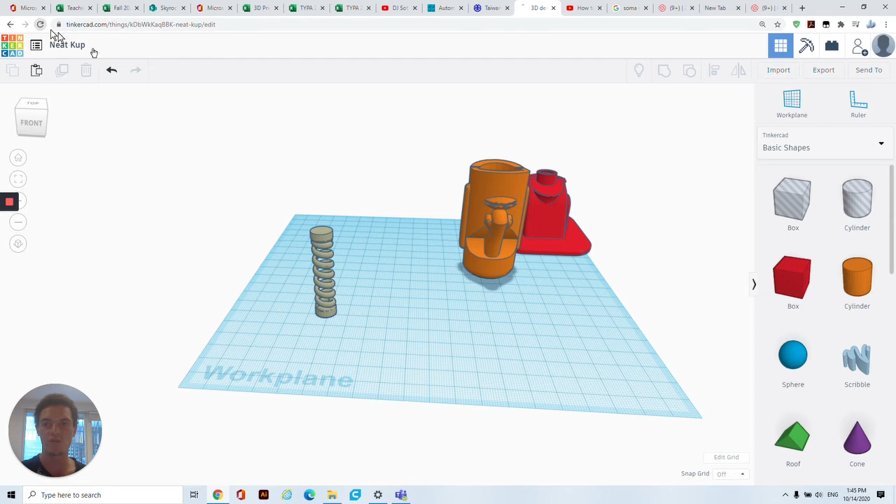I did mention in the last one that you can use store-bought springs. If you decide to use those, feel free to skip this part, but it's important that you follow the same instructions we used in the last tutorial, just using the measurements of the actual physical spring on hand. This will make things easier, and you can skip this part, but I'm going to show you how to do this quickly.

I'm going to show you what our end goal is, and then show you how to get there. So I'm going to import one I've already done.

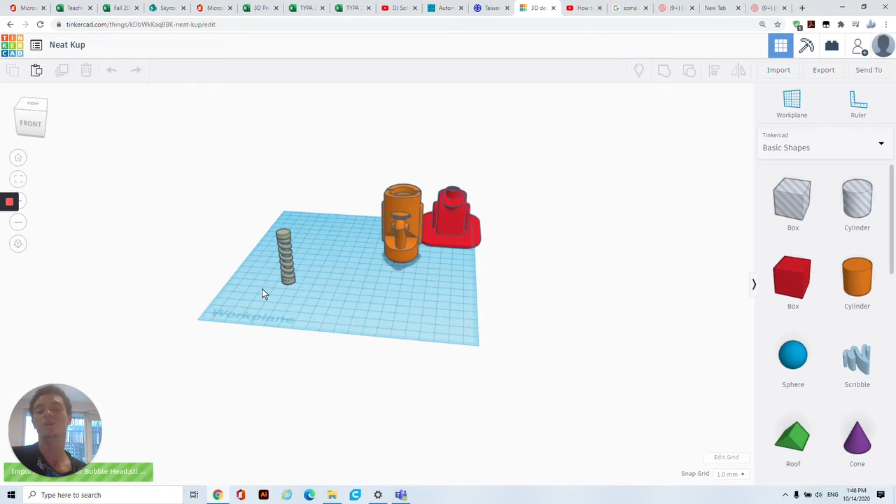So this is a spring with supports. The reason we need supports, or the reason we're going to be making them in this video, is because of the shape of the spring.

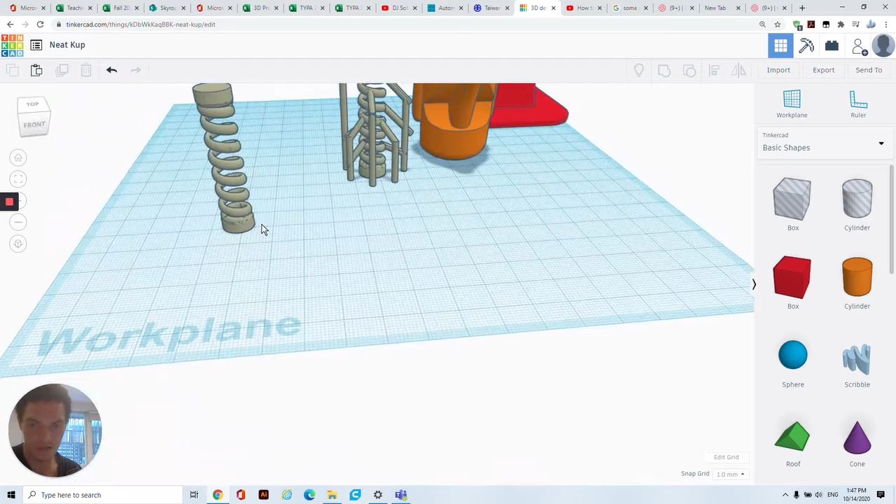A 3D printer prints from the bottom upwards, and notice there are gaps in these springs. As it comes around, it prints the base, which should be fine, it's all solid. As it comes around here, you are left with an overhang with no support. The problem is we cannot simply generate supports because we will need to cut them out.

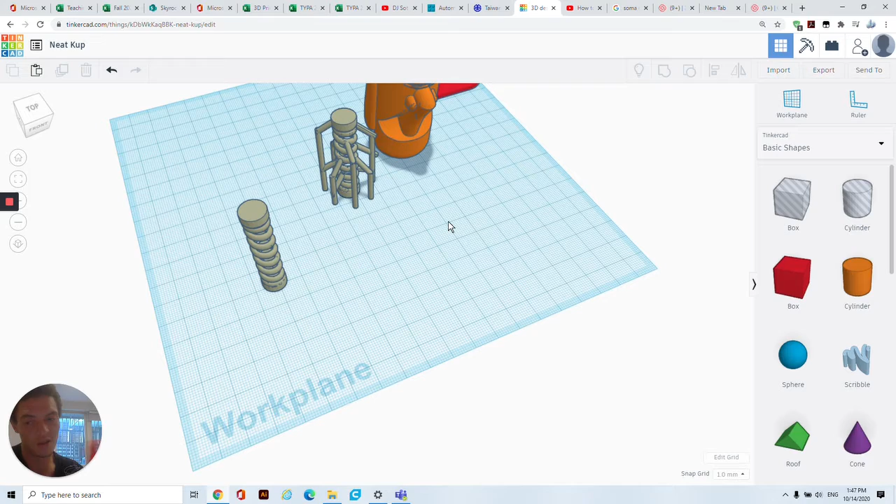The spring needs to be pretty thin so that it achieves the moving effect, so in order to get a successful print, we will need to build supports like this. You can see this one I built earlier. Not the most beautiful looking support system, but definitely an effective one, as you can see.

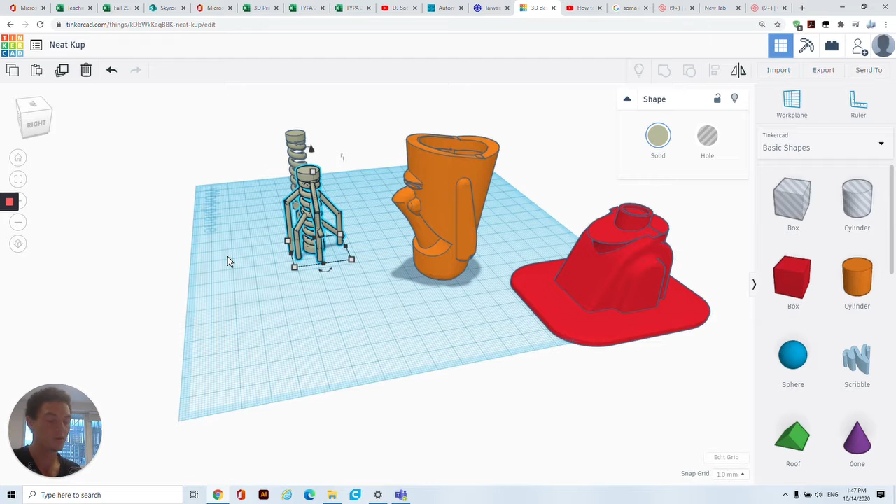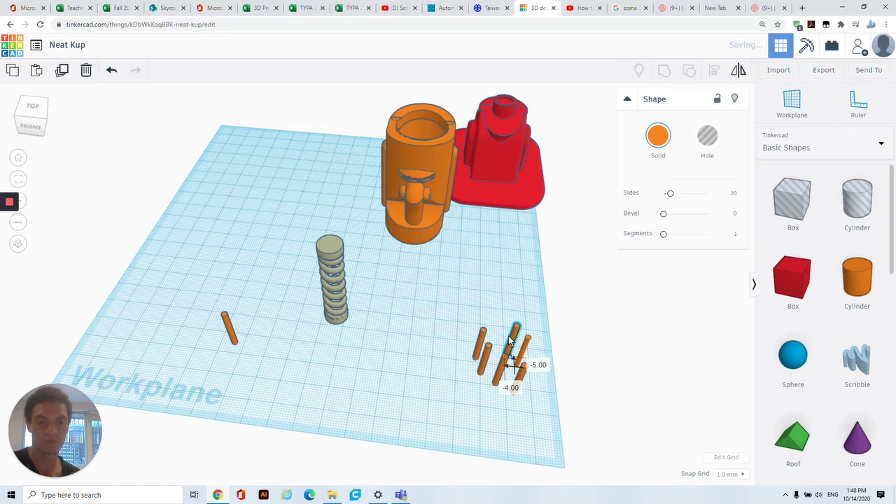So what we're going to do is take this away and start from scratch. First, I want to drag out a cylinder and change my width to 2 millimeters by 2 millimeters. I'm going to make a few copies because I'll keep coming back and using them, just holding down the Alt key and dragging out new copies. I think that should be enough.

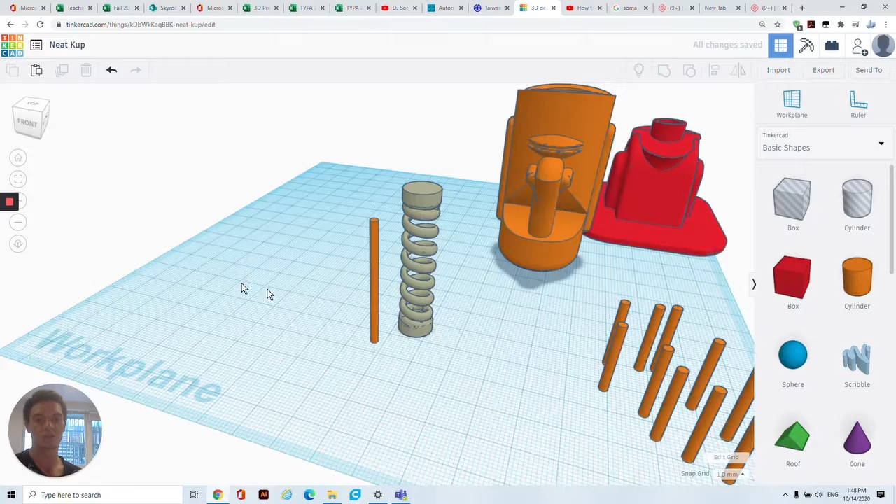So we're going to start over here. You can really start anywhere, because it's a circle, there's no end or beginning. Let's start from the top. I'll adjust the height and take another one, and twist it.

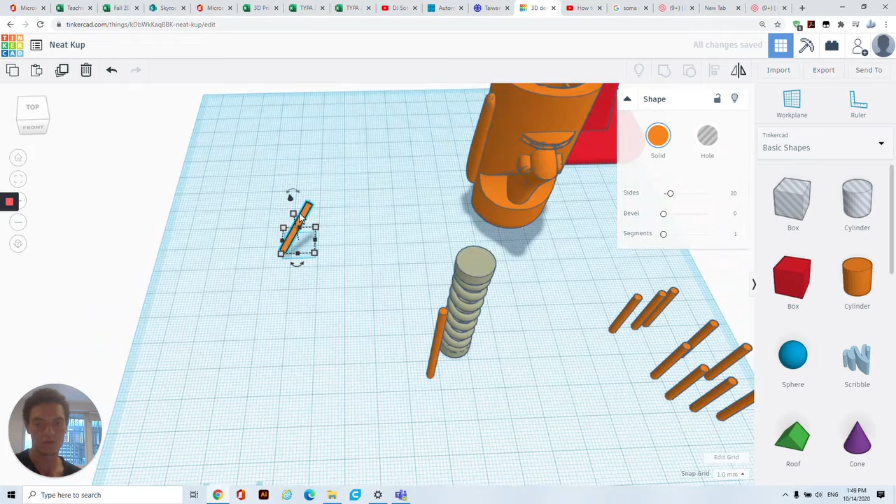Make sure you have the right angle, because what we want to do is put this at an angle so that we may connect it to our spring. So effectively we are designing our own support system. Let's drop that down a little bit so it touches the top there. That works for me, you can change the length a little bit.

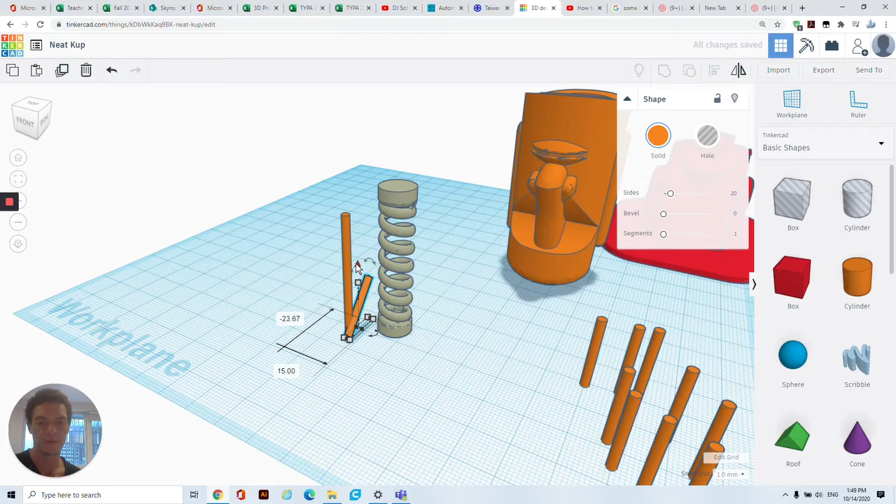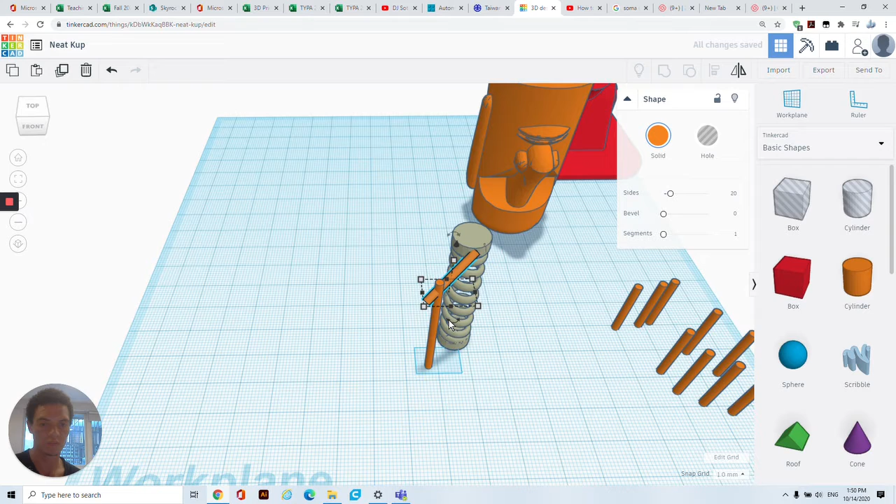Here's the other problem: we need to make sure our length is the right length before we start, because it's very difficult to adjust length while we're busy with our project. This does take a little bit of trial and error. It's important that you remain patient throughout.

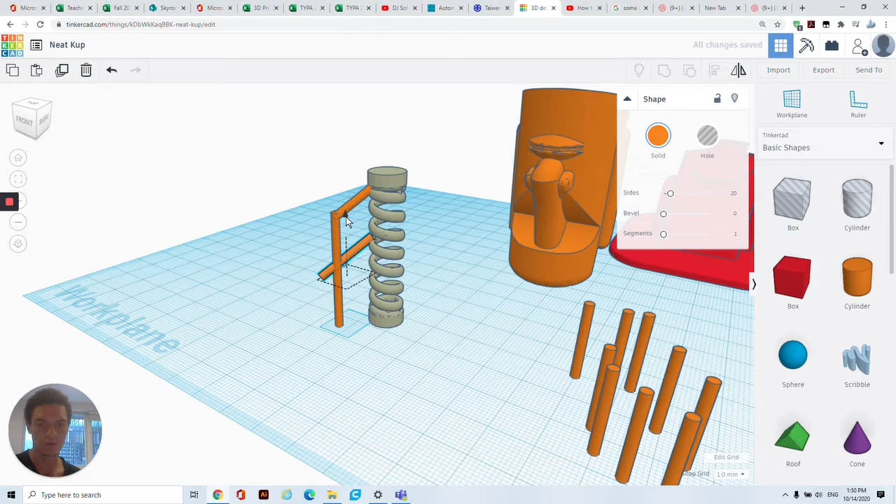That works for me, and I'm going to adjust the height over here. Now that I have that one, I can click on it and duplicate it the same way as the previous one, just Alt and Shift it down. If there's an overlap, let's move it out. I'd rather have the overlap come on this side than the other side of the spring. We want to maintain the integrity of the spring.

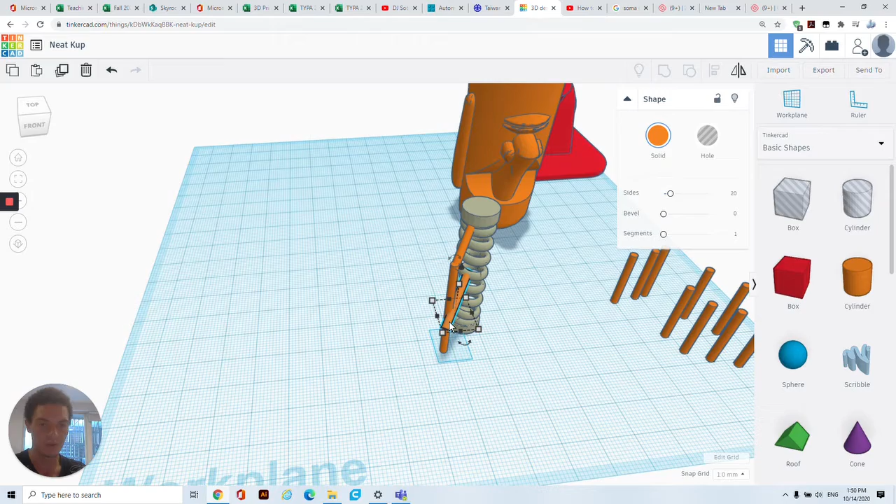So what we're going to do is print these out and cut off these supports. That works for me, move it up a little bit, I'm just going to use the arrow keys to do that. Yeah, that looks good.

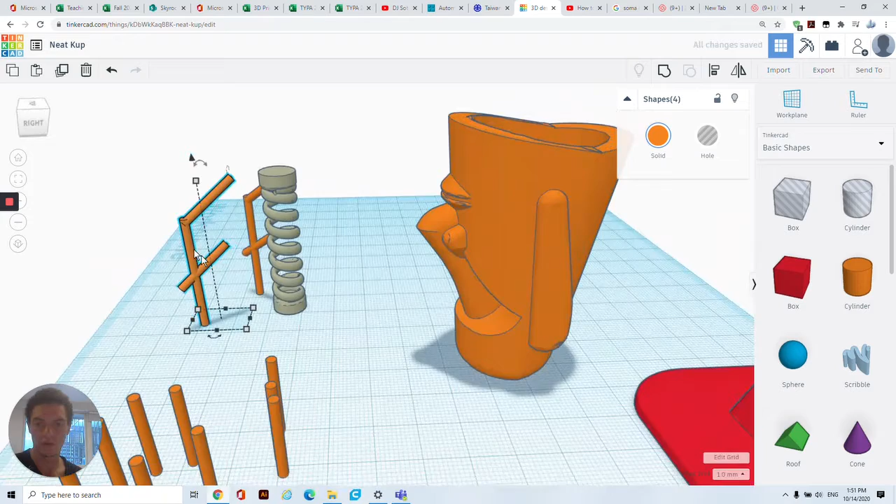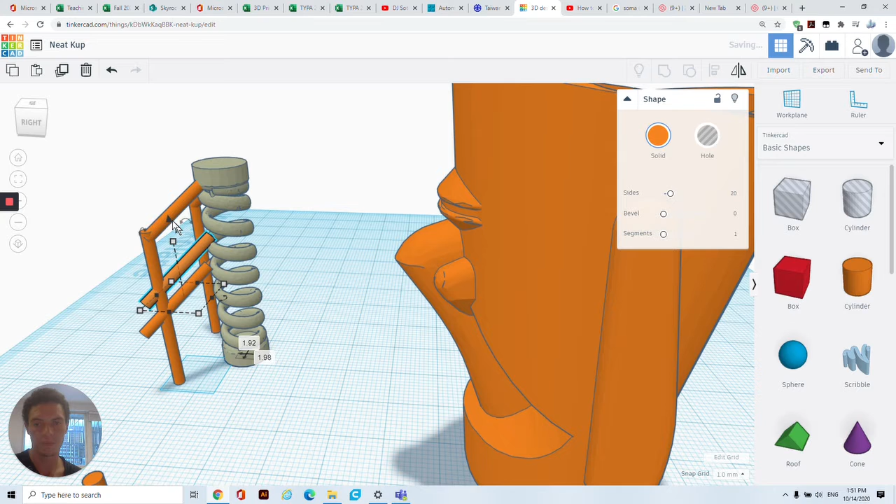And if you want, you don't even have to use these poles, you can actually just duplicate this. Hold your Alt key down, drag it out, turn it around, and then change the positioning. We don't want the same positioning simply because we need to support it in different places as we move along.

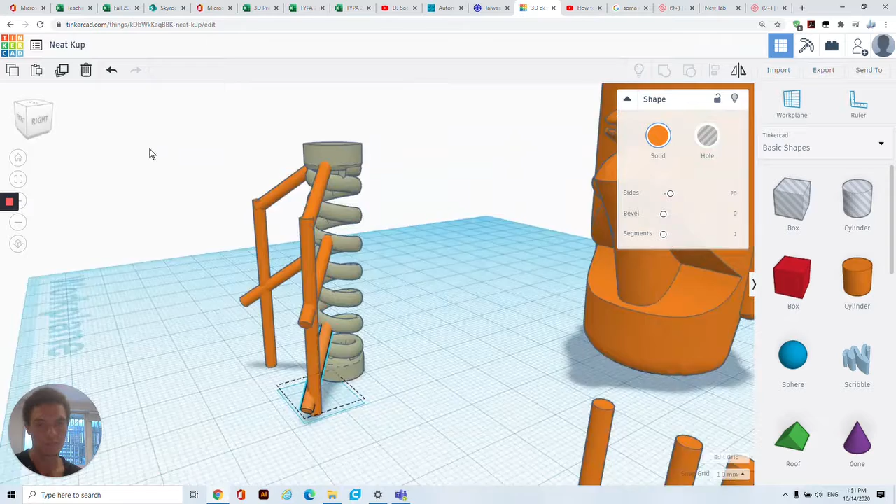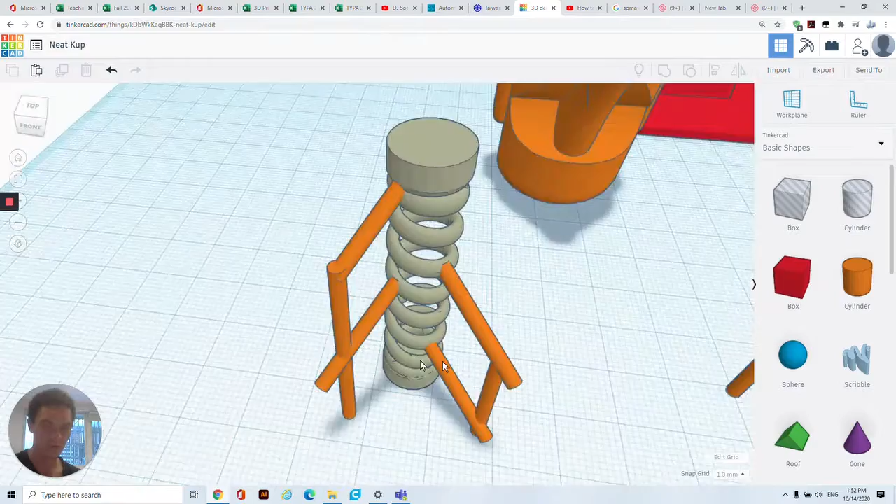This time I can delete the top one and bring the height down. Let's just double check that it's connecting with the spring, there should be some form of protrusion. That kind of overlap doesn't bother me, as you can see on the inside here. So long as we don't change the shape too much, we'll be okay.

Can adjust it slightly. There's always wiggle room where you can play around with the positioning and get some better results.

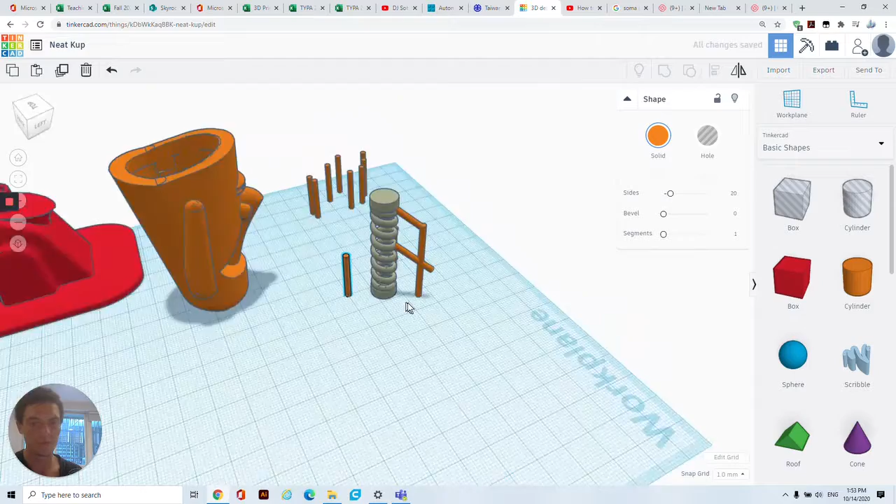Okay, this time I'm going to drag a new one out. So we're just going to keep repeating this process, trying to hit different points. Like in the previous one, I hit the top, now I'm getting this one just above, now the bottom one. So we're going to keep going around and around until we get it right for each little part of our spring.

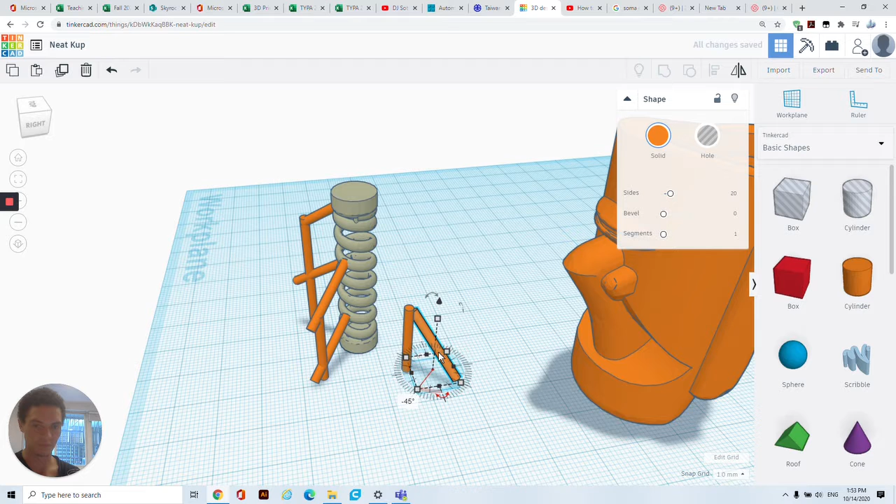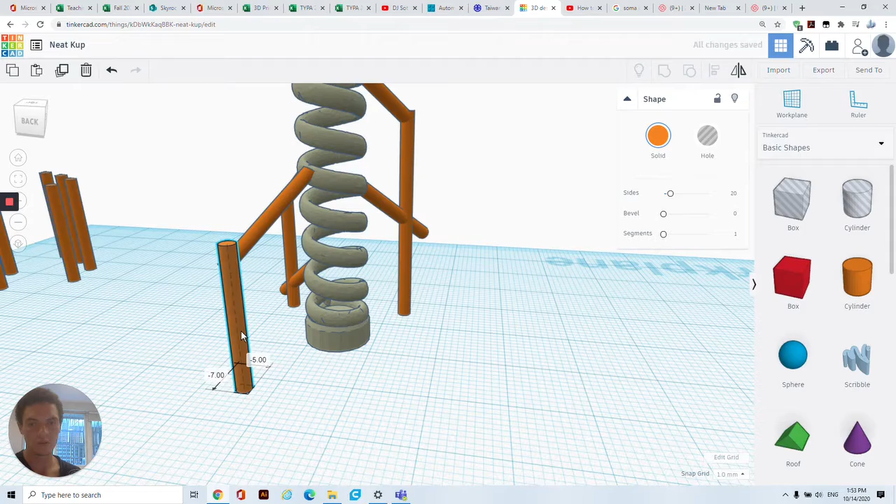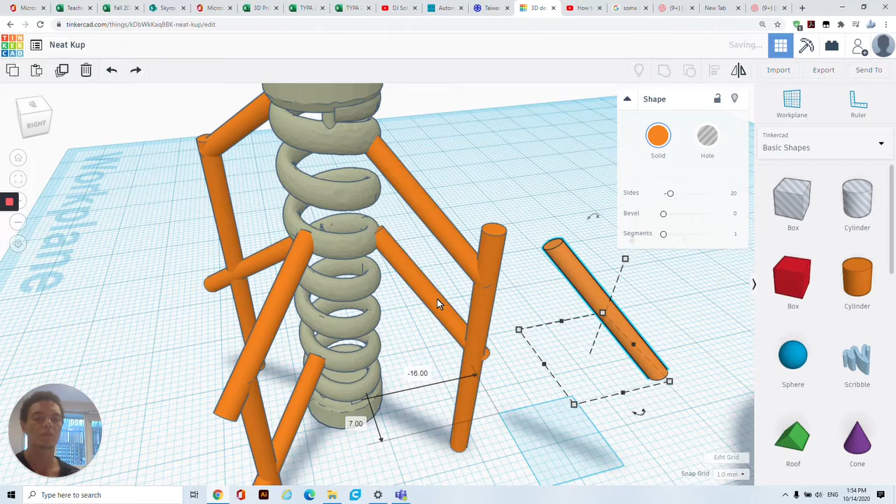Don't forget Control Z goes forwards and backwards, probably the thing I use most in Tinkercad, to be honest, is undo. So make the connection and reposition it. Let's add another one a bit higher up. Control Z that, remember Alt and just drag out a new one. This one, I want it somewhere around here, and maybe one down there.

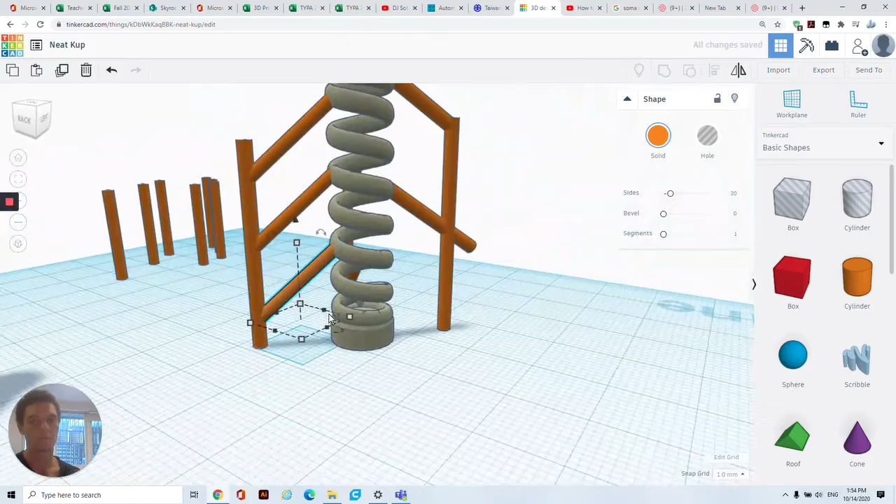Cool, so I'm not going to go through all of this. I want you to go through this yourself until you finally have a finished product that looks something like this, or better than this. I don't want you to strive for the same, I want you to strive for better.

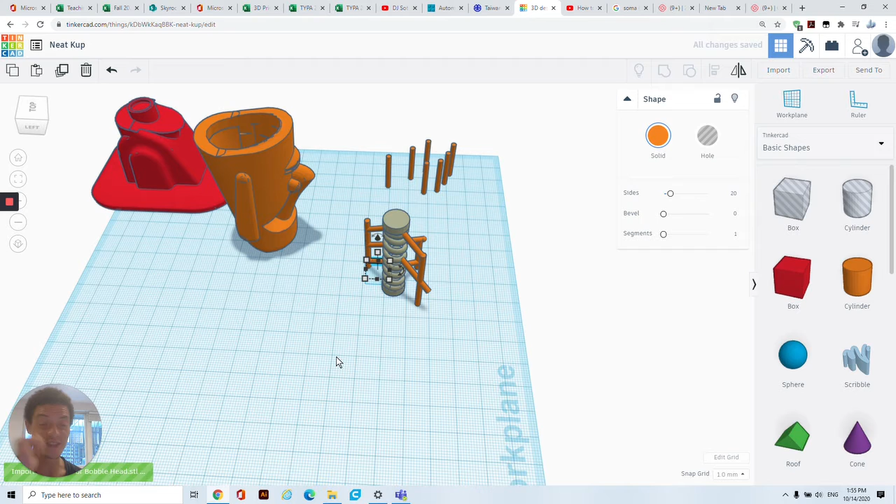At this point, everything you have should be ready to print. The next video is going to be simply assembling it, and it's really simple, it's going to be easy. Hope you had fun, can't wait for the finished product.